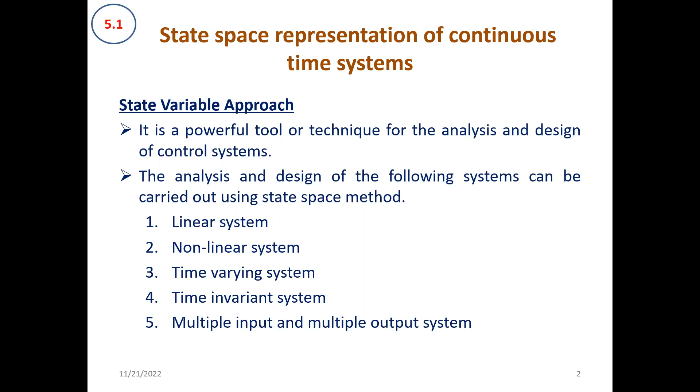So what are the drawbacks of transfer function? Before, we had discussed a lot about transfer function, that is G(s) equal to C(s) divided by R(s); with respect to the input and output we analyzed with transfer function. The transfer function is defined under zero initial condition. It is applicable only for linear time invariant systems and we have to restrict to single input and single output.

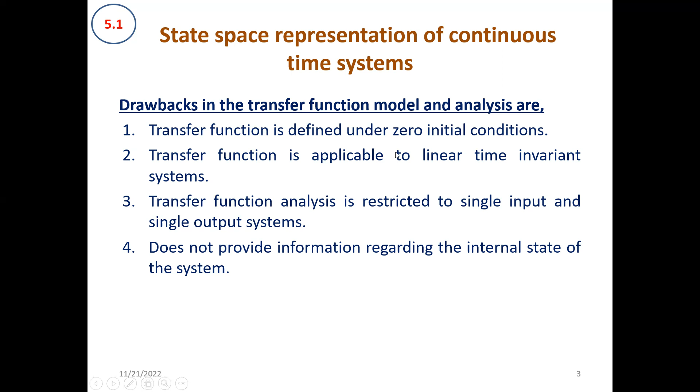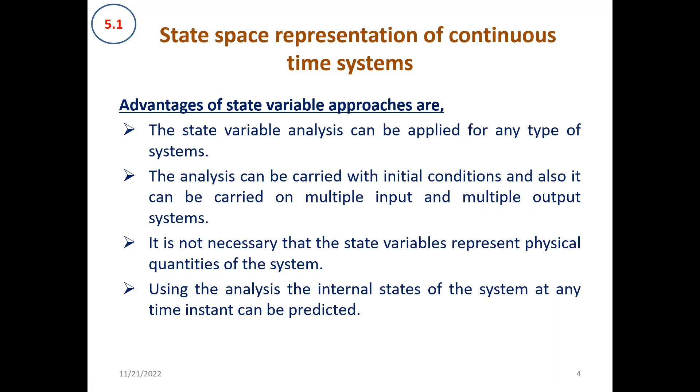It does not provide information regarding the internal state of the system. So this is the drawback of transfer function. Now we are going for state variable approach. Here we can apply any type of system, with the initial condition, and this also carries for multiple input and multiple output systems. It is not necessary to state the variables in physical quantities, and we can predict the system at any instant of time.

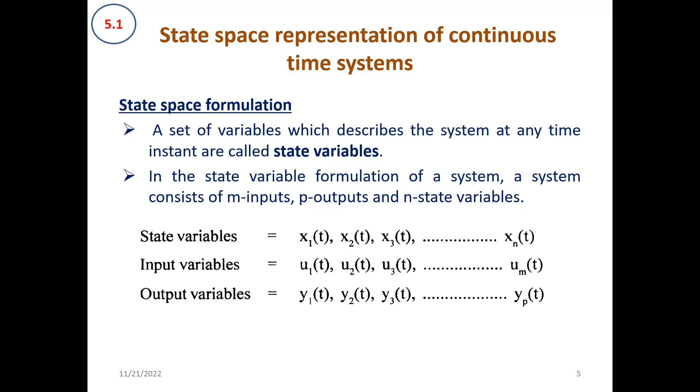So this is the state space formulation. What is a state variable? It describes a system at any time instant. Here we have three variables. First one is state variables, represented as x(t). Input variable is represented as u(t). And output is represented as y(t). We start with x1, u1 or y1 up to n number of variables.

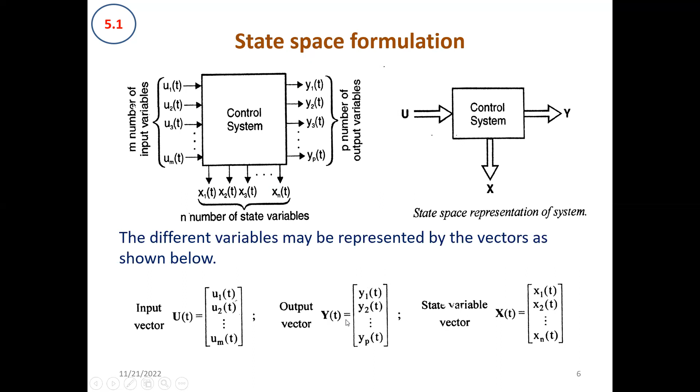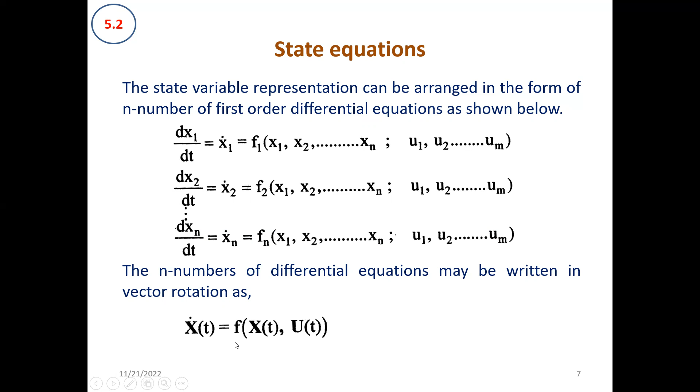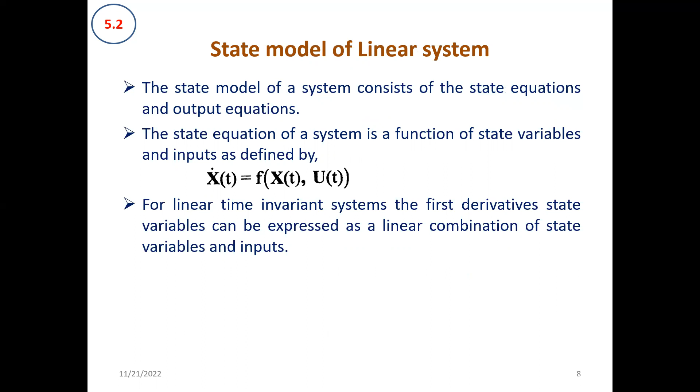The state model of a linear system consists of state equation and output equation. With respect to the state variables, it is defined as x dot of t equal to f of x(t) and u(t). For a linear time invariant system, the first derivatives of state variables can be expressed as a linear combination of the state variables. This is the state model of the linear system, where x1 dot equal to a11 x1 plus a12 x2 up to n number of variables.

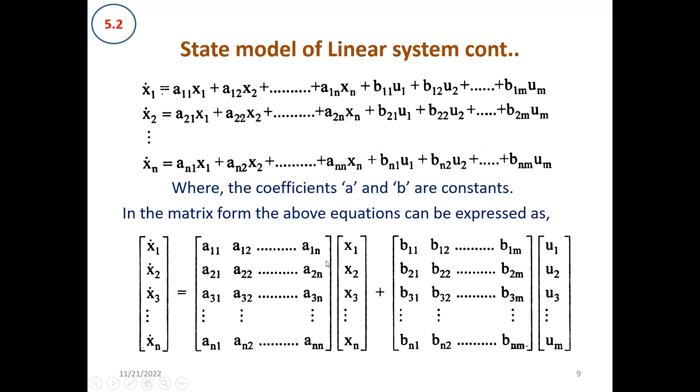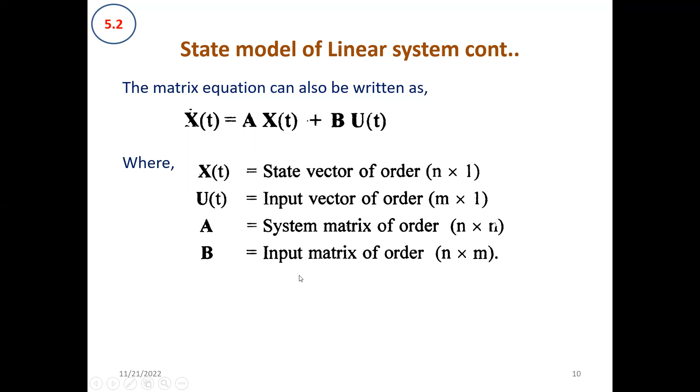With these coefficients we can write the matrix form: x1(t), x2(t) up to xn(t) equals A times x(t) plus B times u(t), the input. The matrix equation of the state model can be written as x dot of t equal to A x(t) plus B u(t), where x(t) is the state vector, u(t) is the input vector, A is the system matrix, and B is the input matrix, each of their order. Now see problem 1 with respect to state model.

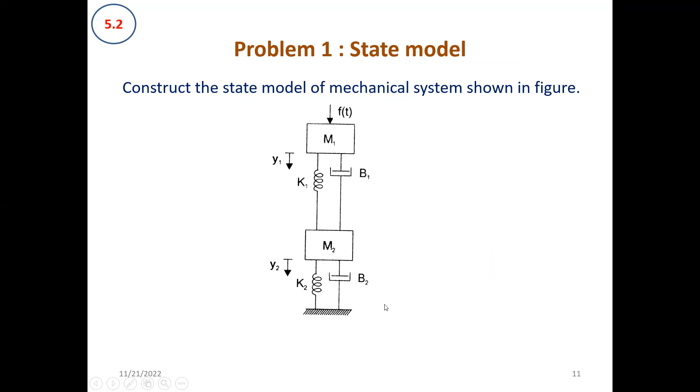Here the mechanical system is represented as a translational system, with M1, K1, B1, M2 and K2. The first step is the free body diagram of M1, where M1, B1 and K1 are connected. F(t) equals the forces of M1 plus B1 plus K1: F(t) equal to M1 d²y1/dt² plus B1 d/dt (y1 minus y2) plus K1 (y1 minus y2).

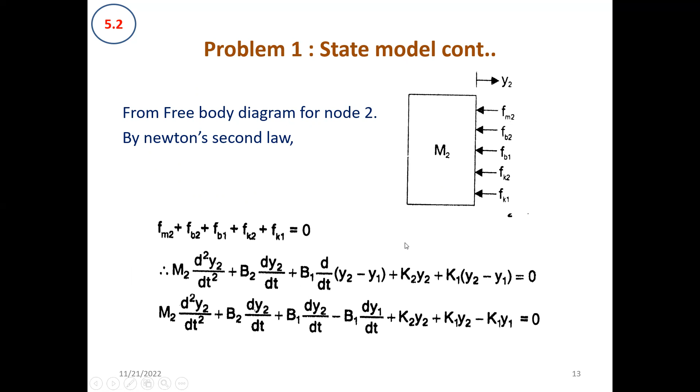Then we draw the diagram for M2, where M2, B2, B1, K2, K1 are connected, and write the equation. Now we choose the state variables. f(t) is represented as u(t), where x1 equal to y1, x2 equal to y2, x3 equal to dy1/dt, x4 equal to dy2/dt, x3 dot equal to d²y1/dt² and x4 dot equal to d²y2/dt².

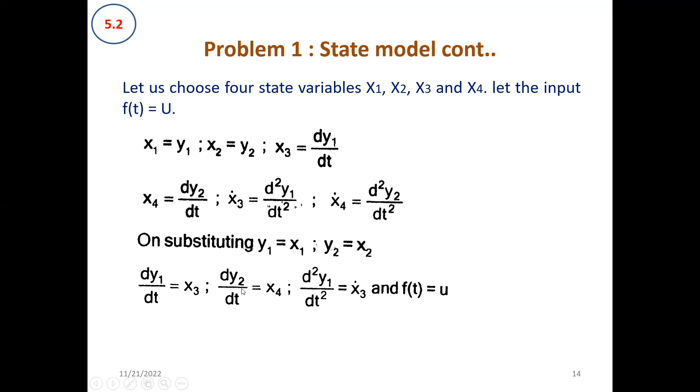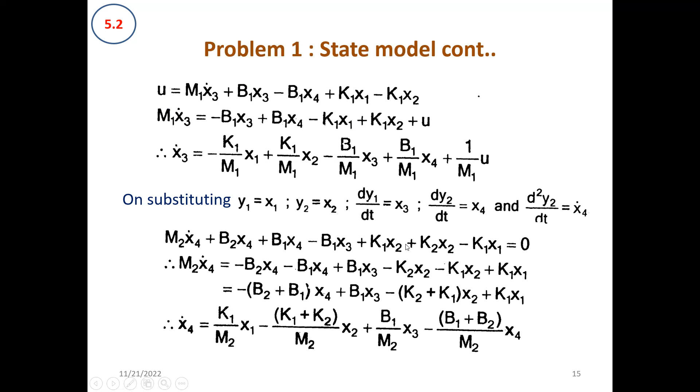Substitute all this in the equations, and we get u equal to M1 x3 dot plus B1 x3 minus B1 x4 plus K1 x1 minus K1 x2. So we identify x3 dot by dividing by M1. Likewise, substitute y1 equal to x1, y2 equal to x2, dy1/dt equal to x3, dy2/dt equal to x4 in equation 2 and identify x4 dot, dividing by M2.

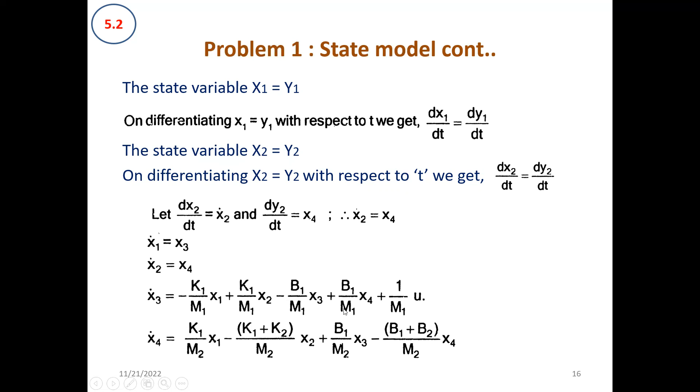Differentiating, dx1/dt equal to dy1/dt, we get the state variable functions: x1 dot equal to x3 and x2 dot equal to x4. x3 dot and x4 dot are already calculated. Now write the matrix in the form x dot: in the first row 1 is in the x3 position, in the second row 1 is in the x4 position, others are 0. The x3 dot and x4 dot rows come from the equations, and 1 divided by M1 multiplies the input variable.

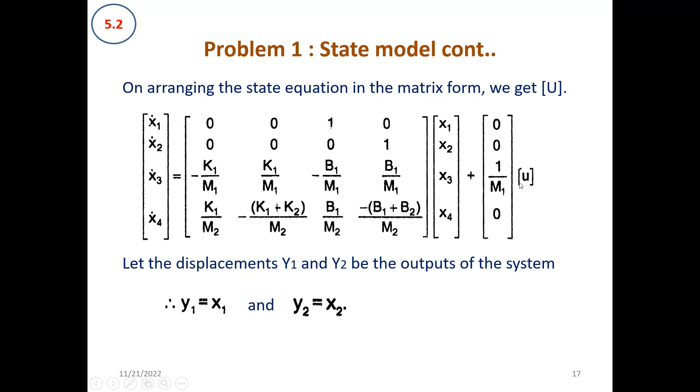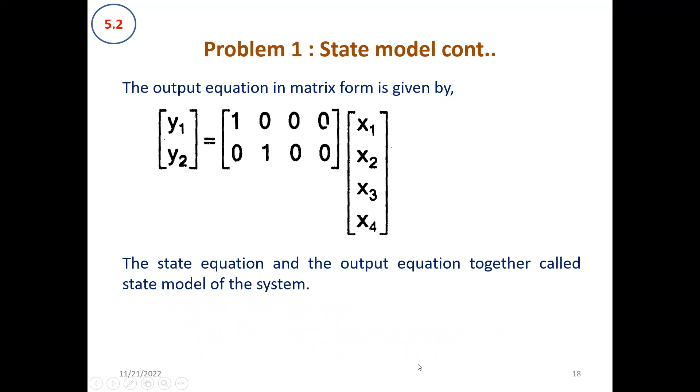This is the output matrix form: for y1 we have 1 0 0 0, then for y2 the second element is 1, others are 0. Likewise we can solve this problem. Thank you.